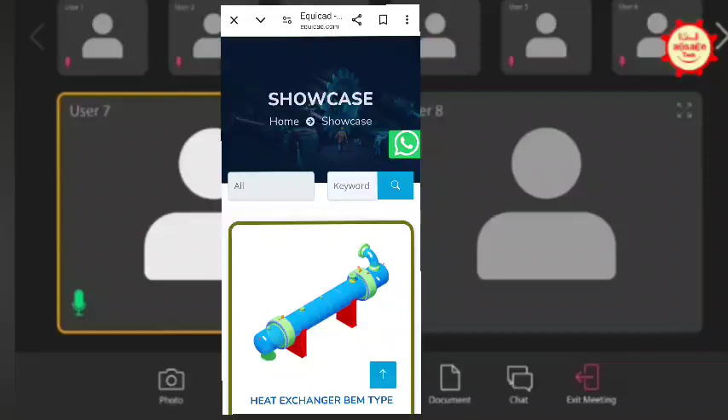Okay, Karthik, do you have any issues, anything you want to discuss? Yeah, just I would like to know what this UG-44B requirement is for the nozzle flanges. Are you aware about that D-rate check for the nozzle? Yeah, what do you want to know regarding that? In my case, I'm facing some issues. When it comes to 150 rating, it's getting failed in UG-44B. What will be the solution for that?

One thing we need is to increase the nozzle rating, or else we can do Appendix 2 for those nozzles. One option is you can try to reduce the nozzle loads. Otherwise, you need to increase the flange rating. No other option.

We can do Appendix 2 for that, right? Is there any section in the code? No, but if you do also, what help do you get? You don't get any help because Appendix 2 is worse. No, if I got passed in Appendix 2 it's okay, right? Because I could see for more than 6 inch and 8 inch, it will get passed in Appendix 2. For the below sizes, I agreed it will fail in Appendix 2.

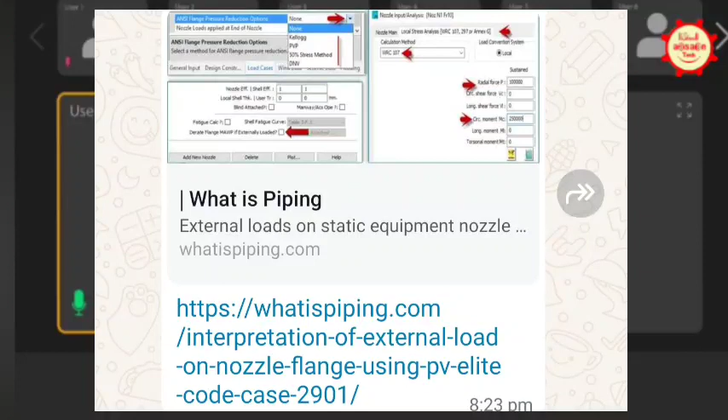In PVElite UG-44 calculation, there are 3 methods being followed: PVP, 50% stress, and DNV method. I've sent the procedure and calculation used for that, along with a link shared in the group.

This option is in the nozzle dialog box. If you go to nozzle derating, nozzle MAWP, you will find the table with UG-44, and there will be 3 options. Generally nowadays UG-44 will be PVP, with a statement that PVP is just the UG-44 calculation. The next column is 50% stress, and the next is DNV. The worst of all 3 is considered as the MAWP.

But logically, if you see, that is to be taken care of. The code may say it may be required, but not mandatory - it's good engineering practice. I mean, because 99% of people will ask for it and are doing it.

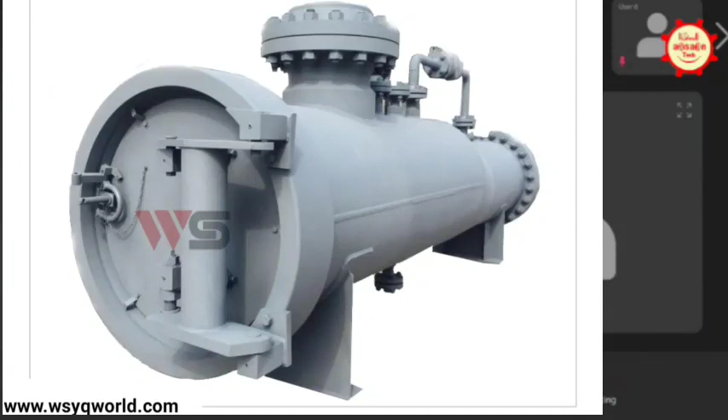No. Lastly I had an issue, but I think Ramakrishna sir might be right on that saddle thing. Last time I sent an inquiry regarding the saddle supported vessel that was inclined. I wasn't able to capture a photo this week, I was very busy, but my CG was very near to the left-hand saddle, so that might be one of the concerning issues.

So how did they solve it? As of now, the client has not commented back. We provided him the calculation about 1.5 weeks ago, but he has not responded. It's a problem during maintenance - if they want to remove it, as soon as you open the bolts, it will fall down.

Maybe you can add a counterweight on the other side. Counterweight or some supporting - if you add that also, I think it's better. So that is also like a counterweight only.

So you need to add some mass - directly on vessel, or just add some structural supports.

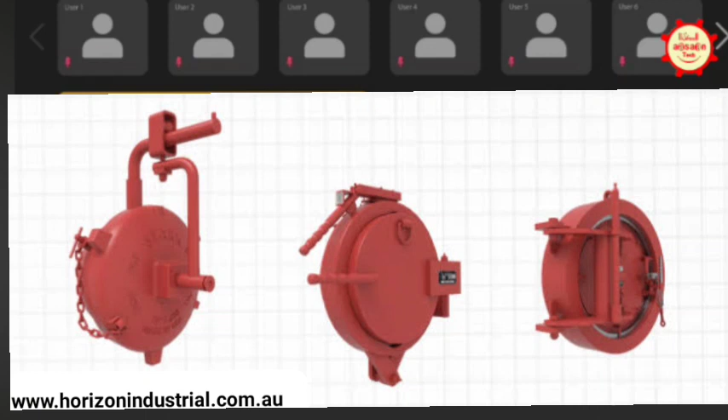You can say at the bottom side. The thing was, QOC was the first of a kind job for the company, so none of the people thought that if the QOC were opened in an empty condition, one third of the weight would shift to a direction not considered in the calculation, because generally QOC is massive compared to the rest of the vessel, especially when the length is short.

This is a filter. What kind of filter vessel? Filter vessel, yeah.

Okay, so your issue is just the CG is shifted, so you want to make some additional support to hold that shifted CG. Yes. Actually, the client concern was that during maintenance, when they open the QOC, the bolt should not fail in that uplift position.

He's concerned about the bolt, but as soon as you open, it will fail. It will fall. One more option is, instead of attaching the hangers to the vessel, you hold it with an arm-type lifting arrangement that holds your QOC. When you open, the arm-type lifting pulls it out, and no load will be transferred to the vessel. That's also one more option.

In some of our maintenance of these pig traps, we used to do it like that, because if load comes on one side, rather than holding the opener by the hinge, that hinge will be removed and it's directly connected to a crane-type arrangement. The crane will keep holding the opener, and then it will be pulled out. So no load will be transferred to the vessel.

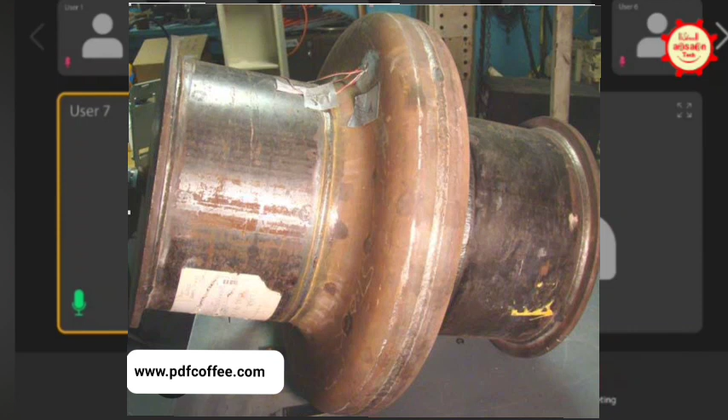Actually, somebody can tell their experience about Inconel material, generally where it is used and what the composition is. I have only seen it in bellows. Anshul? I used 8020 on a vessel and 8810 on pipe. Okay. So generally is this used for high temperature, or where is Inconel used?

Yes, the 8020 vessel was for a filter vessel, a highly corrosive environment. Sulfuric acid was the fluid. Onshore project. So in my case sulfuric acid was the fluid, which is why they had the requirement of Inconel. And for the double pipe heat exchanger, the temperature was 800 degrees Celsius. So it is high corrosion and high temperature.

Okay. So up to what temperature can we use this material? I guess 825 to 850 is the limit for which allowable stress is present in the code. But after 500 and something, the creep range starts. So you want to say below 500 it's better to use? Yes. By the way, what is this creep range and what is the concern?

The creep range is, how to explain it? The material behaves with elasticity. Over high temperature during service, the material will start to lose its property in a certain way, and it will most probably crack at much lower stress than it should, because repetitive load will be there.

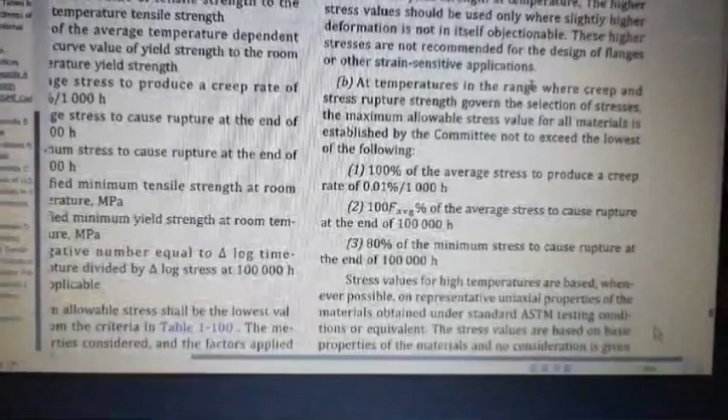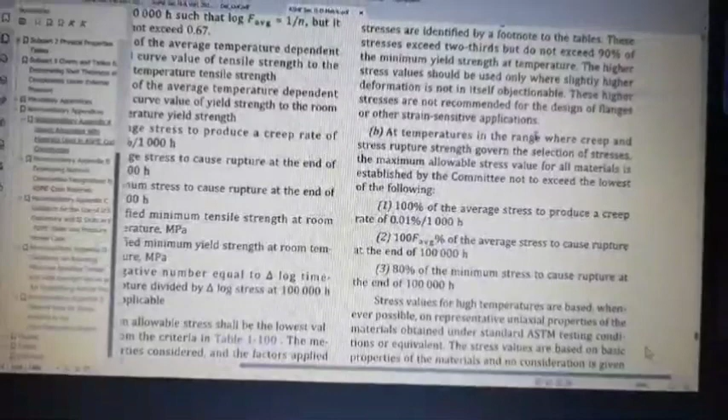Yes, one more distinction. You will find the creep values in italic. Can you share the screen? Is it visible? Yes. So it will come out about 11.4 years. Okay, so this is duration, it is not about cycles. Yes, for 11 years, it should be okay.

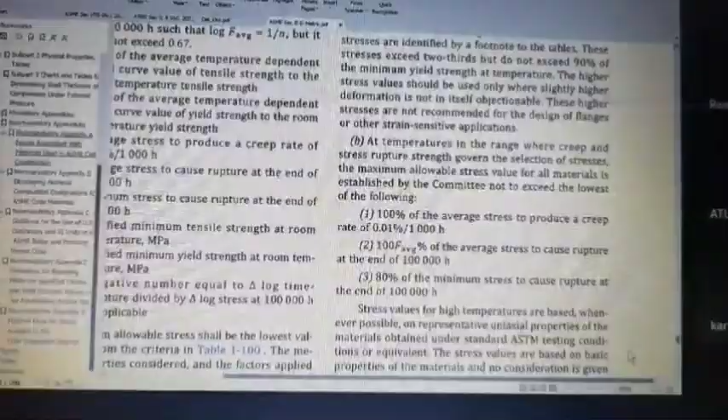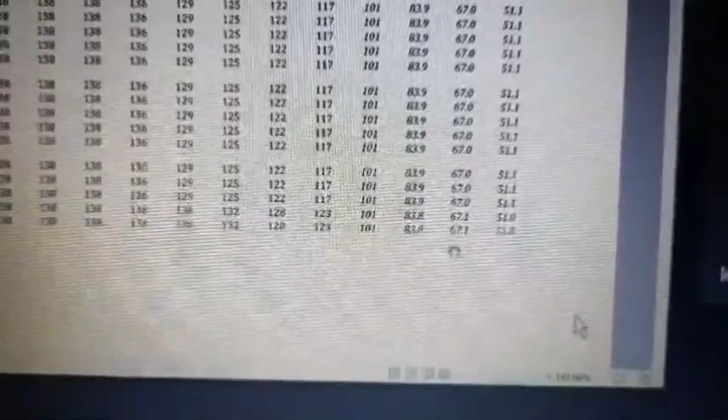Yes, grade 70. So you will see 138, 138, 138, 138, 136, 132, 128, 123. Then after 123, 101 and 83. So the creep range has started at about 400 degrees Celsius. So where they put it in italics, can you zoom in? Yes, see clearly. Okay.

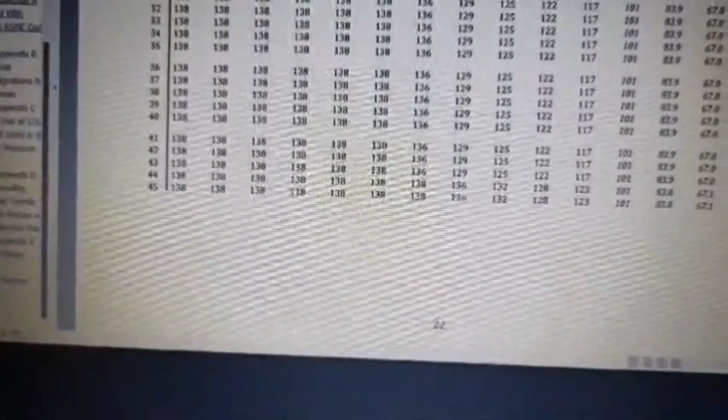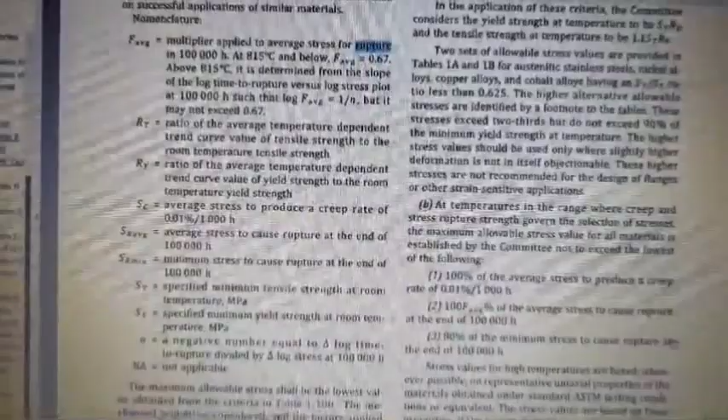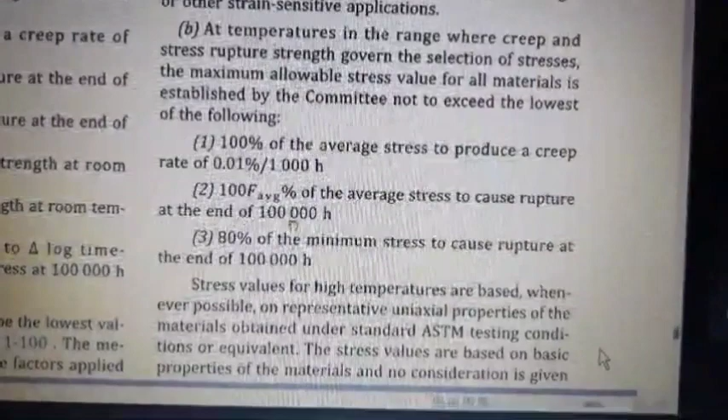As you will see, for high temperature where creep starts, they provided the values in this range: 100% of the stress will cause rupture at the end of 1 lakh hours. So on that basis, you can have the life cycle of that. But you have to assess if fatigue is required, then you have to do the fatigue analysis.

But generally, most of the vessels operate continuously. Maybe they will be shut down once a year, like that. Maybe 25 times. Such low fatigue means it's not a concern. Not required. Even in my case, at the higher temperature, fatigue was not required. So whenever the condition is in the creep range, we need to check for the number of cycles, right? Yes.

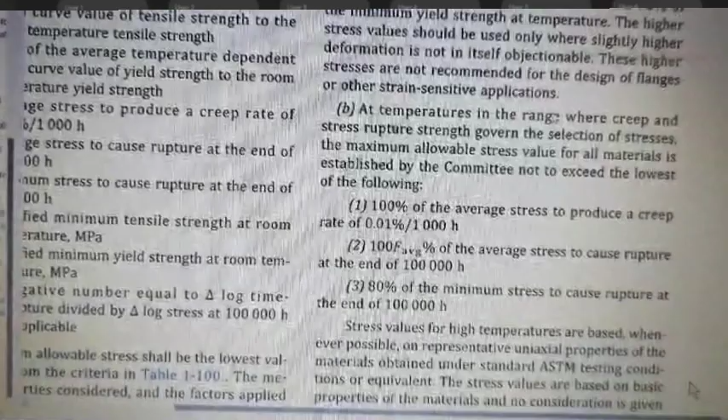Generally 1 lakh, what is that? Hours? They've given hours? Yes, number of hours. That is life, not cycles. Can you share that again? Just a second. Range of creep, select the stresses, the magnitude. So it will come out about 11.4 years. So this is duration, it is not about cycles. Yes, for 11 years, it should be okay.

So after 11 years they will assess, how will they assess? What kind of assessment will they do? You have to do the material assessment. I don't have experience on that. I think this is remaining life assessment. Atul has done assessment of a used vessel, no? So it would be similar. You might be able to explain that.

Atul, did you do any remaining life assessment? Atul Sharma, you are on mute. No, for life, I only did it for anode calculation. Okay, so vessel remaining life assessment you didn't do. No, I did not do it.

Okay, we did some remaining life assessment, using I think API 579. There are some procedures given in that. First the vessel needs to be inspected completely, and the remaining thickness calculated. Then how much it has reduced over the 11 or 13 years, what thickness was initially considered and what the thickness is now, and accordingly they will decide how many more years it can run or whether the vessel should not be used. Like that they make the assessment. Okay.

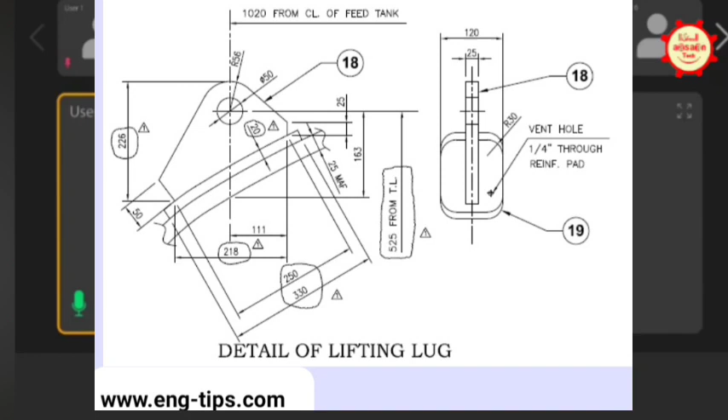Okay, then no issue. They also wanted the calculation as per ASME Section VIII Division 1, but the lifting lug as per PD 5500, and the rest of the calculation as per ASME. Why only the lifting lug with PD 5500? I don't know. But for the lifting lug there is no calculation in ASME as well.

Yes, but if you select ASME, they just do the WRC calculation and a manual calculation of bending moment, shear and tension. So that's okay, but that is not ASME. It's a general calculation, not part of a code. It's good engineering practice, referring to some books, Dennis Moss and others.

But the concern is in PVElite, when you select ASME Section VIII Division 1, that will be the only calculation that comes out. Yeah, but it doesn't mention any clause or reference to these codes. It just gives the tension and these values. I generally skip the PVElite calculation. I don't use it, because it is not correct. Even if you select PD 5500 in PVElite, is there any difference in the calculation for the lifting lug?

The rest of the calculation will also come. Yeah, but lifting lug, no. What I'm saying is, generally I don't use PVElite calculation for lifting lug and tailing lug. You just do the manual calculation. Manual calculation, that is better. Yes, always, that is better, na? Because PVElite won't consider my cases and all those requirements.

Yes. But with manual calculation, the concern is with clients. Normally we work on the client side also. Their concern is that in Excel even a small error, if you assign F5 or you assign F6, then the complete value changes. So they are not sure that Excel calculations are that authentic. So they believe more in the software outputs, so they require that one. Yeah, but software is also not correct, na?

So after the meeting, can you share the screenshot of the location where the thickness requirement of the tailing lugs is coming? Tailing lug thickness you want? Yes, where in the code calculation they provide it, because I ran the calculation and when I search the tailing lug, the required thickness is not there. That option is available in your skirt design. Yes, I've added the skirt, I've added the tailing lug also, the thickness and the hole size, everything. But after running the calculation, the required thickness is not shown. Tailing lug required thickness you want, right? Yes.

Maybe in the tailing lug I am missing something. Yeah, the tailing lug takes few inputs only. Okay, I will share that with you after this meeting. It takes only the width of the tailing lug, the location of your hole, and the thickness. That's it. Yeah, but he isn't getting the thickness value. You want the thickness value, right? Yes. Okay, I will.

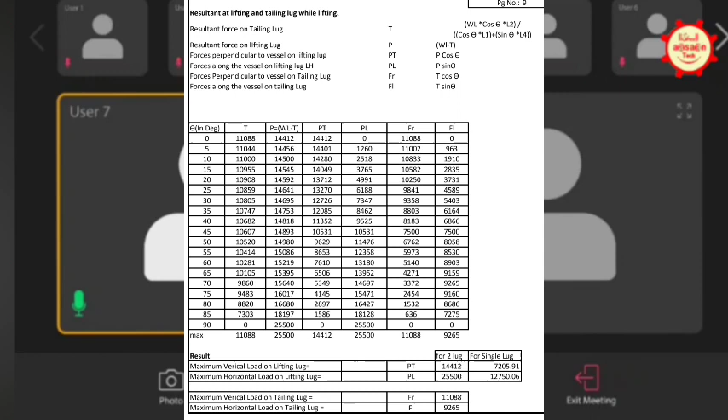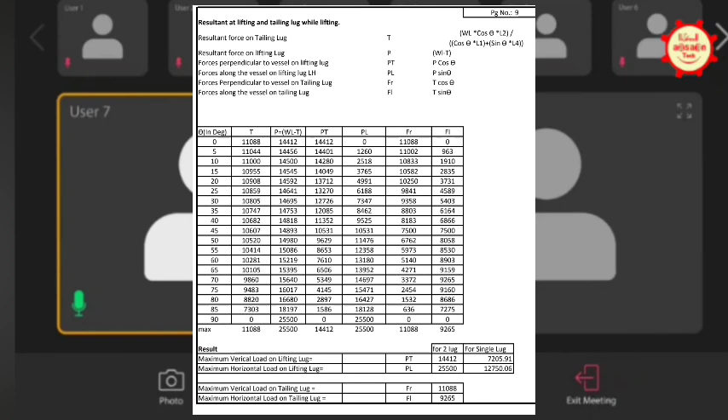But for this tailing lug, during the lifting there will be different angles, right? For that also the thickness has to be considered. Different angle, different moment will come. Yeah, I think PVElite does that calculation. Because this calculation is not that easy, it's complicated because it's a tailing lug. During the lifting, the vertical vessel or column will tilt through every degree, from 0 to 90 degrees. At some degree the moment will be high. So that's why it's not that easy. But PVElite is doing all that.

There is one option in PVElite, rigging analysis. In rigging analysis, the analysis for the lifting comes. It checks every angle from 0 to 90 degrees as it tilts, gives the values, finds which angle gives more stresses, and accordingly gives the thickness required. No, that rigging analysis is to check the longitudinal stresses in your shell, not for the lifting lug or tailing lug design. But it includes the tailing lug and lifting lug inputs. It will include the tailing lug, because normally when I used to do the calculation, we didn't do it in PVElite.

We were supposed to do it in Excel. Yeah, so before it was complicated. In Excel, you have to put all the weights, and the weights come at different elevations. Automatically, Excel will take it. So then, in the tailing lug, the moment will change at every point. You have to again change the input for the thicknesses. I mean, before, the thickness was also done in Excel only, but in 2019, I think, it started in PV Elite.

They're giving the rigging analysis also in their software, I think. No, it is given. It has been there since the beginning; it's not new. Yeah, in the Dennis course it is given. They describe how to do the calculations, all the degrees. For the tailing lug, the calculation that you used to do. It's not only the tailing lug, it's combined. I mean, the input is bottom and top.

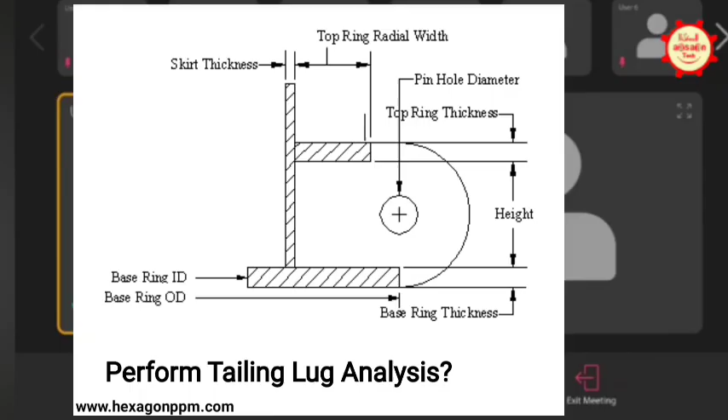For the moment arm of the tailing lug, lifting lug, or anything, how much distance do you take, from center to the base top ring, or from center to the attachment? For the moment arm, you consider the distance to the lug center. Normally you put a hole in the tailing lug to lift. So that hole point is where you consider the distance from, because the load is not only the tailing lug, your sling also comes at that point. So the center point is your hole position.

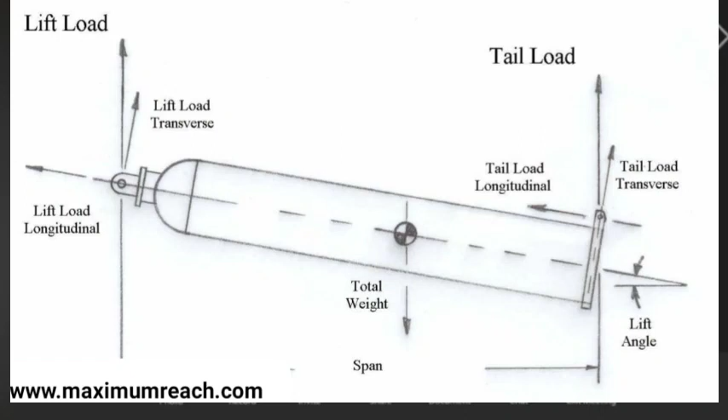Before the hole and after the hole, there is some material. Depending on how much material you give, the width will also change. If you do the calculation, the width will change, and you will change the height of the tailing lug also. You have to do some manipulation. So it's not only the thickness; lots of things need to be considered. Basically, section modulus. Yes, correct.

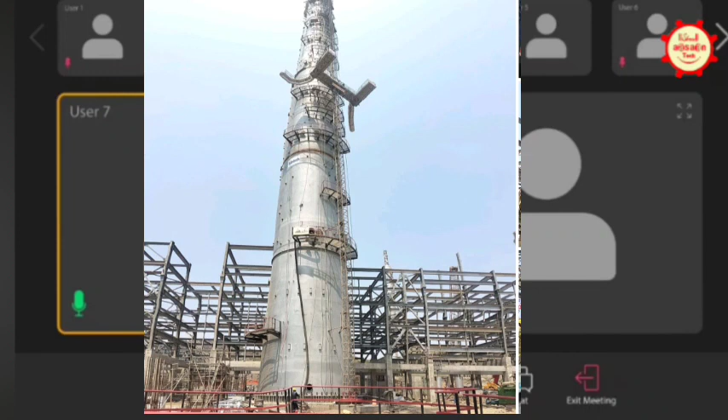By the way, is your lifting arrangement using a trunnion or a normal lifting lug? Normal lifting lug. Then I think you can do it. You can take a higher thickness, because in my case I'm talking about a column which is very heavy. So you have to take this into consideration, cost-wise. It's a big column. You cannot just take the risk, and you have to put the bracing beams also. That comes in the same calculation: where to put the bracing beams, and what is the section modulus of that bracing beam.

So is this long column shipped in multiple pieces, or single-piece transportation? Single piece only. What is the length of the column? There are multiple columns, but the height is almost 60 meters. Oh, okay, 60 meters. I think it's not an issue. Sometimes the diameter is 6 meters. So it's really heavy.

Anshul, you got this rigging analysis and tailing lug, okay. We'll share whatever inputs we have with you. Yes, no issue. Thank you.